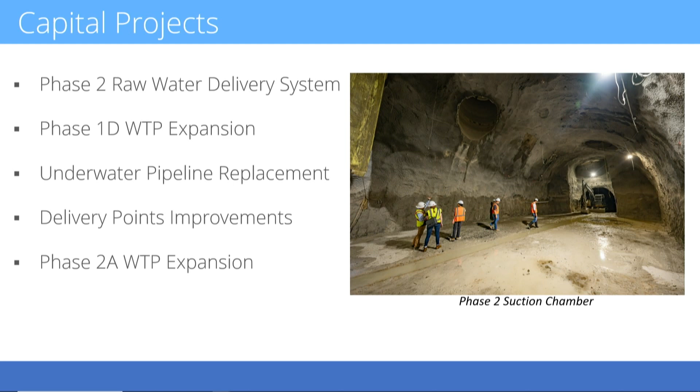I'm going to run through the same projects we've been doing for the last year or so, give you a brief update on the status and how we're doing contractually. The projects I'll cover today will include the Phase 2 raw water delivery system, the Phase 1D water treatment plant expansion, the replacement of the underwater pipeline, delivery point improvements, Phase 1 and 2, and the Phase 2A water treatment plant expansion. I want to start with the big one, the Phase 2 raw water delivery system.

We issued NTP back in June of 2022, so we're beyond halfway on that project. Contractually substantial completion is February 16th, 2027, with final completion of April 17th, 2027. So we're at about 56% on a time basis, 945 days of 1,700. In terms of contract value, we have paid just under $117 million of the $225 million contract value to the contractor, which is Thalle SAK Joint Venture.

We have had one change order on the project for $237,000, no change to contract time as part of that change order. That change order covered a number of things, but the primary item on it was to add some additional electrical improvements to tie a new generator at Cedar Park's water treatment plant into the Phase 2 system. They purchased those generators after we had started construction. And then with this particular project, the contractor is behind schedule. It has triggered the need for them to submit a recovery schedule, and a recovery schedule is still pending.

I want to cover some of the work that has been completed on this project since the last update that I gave you. We did achieve a major milestone on the project. The contractor did complete the concrete cast-in-place liner on the intake tunnel, or the tunnel going from the intake to the pump station. That's about an 8,800-foot-long tunnel. Substantial amount of concrete went into that operation. They have completed that and removed the formwork, taken that tunnel all the way back, if you remember having gone down there before, all the way back now to the main shaft.

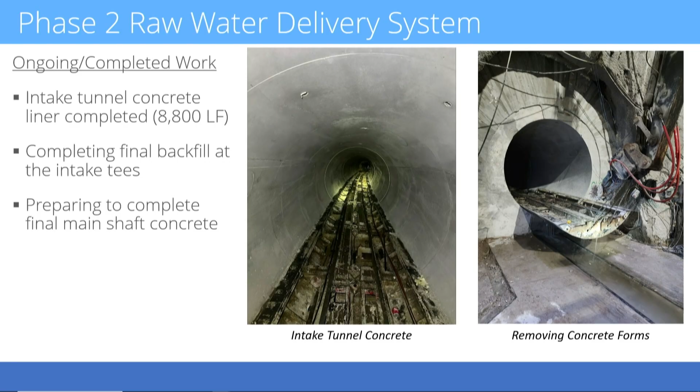They have then gone back into the tunnel, and they're completing some final work at the tie-ins for the 2 intakes at the far end of the tunnel to complete that tie-in to the cast-in-place concrete liner. And the contractor's now preparing to do the lining of the main shaft. There's a portion on the bottom of the main shaft where they had not done the concrete work. They wanted to wait until they brought the intake tunnel concrete back to the main shaft, so now they're working on tying in the main shaft concrete to the tunnel concrete.

Work is also ongoing for the pump shafts. There's a total of 6 pump shafts on the project. The contractor's going through a process of mining out those shafts with raise bore construction, installing a steel casing within those shafts, and then lining that steel casing, backfilling it with grout. Happy to report the contractor has now completed 2 of the pump shafts. Pump shaft number 2 and number 5 were completed about a week ago, and so they're moving over to starting the raise bore operation for pump shaft 1. And you can see a couple photos of those shafts looking both from up at grade at the pump station side and then down beneath at the suction chamber.

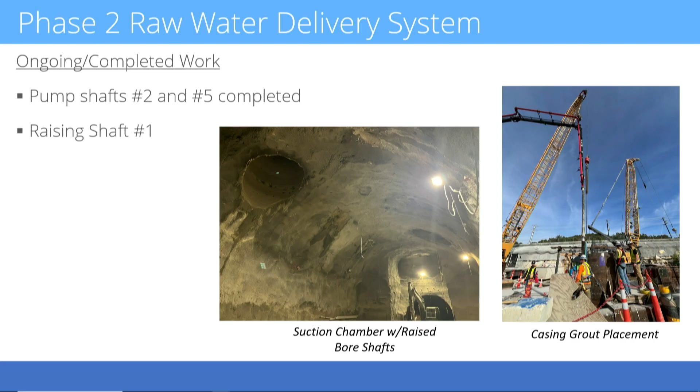In the last few weeks, the contractor has also completed a major work effort at the end of Trails End Road, where they needed to go into the 78-inch diameter pipeline that had previously been installed during Phase 1A and add a butterfly valve, a 78-inch butterfly valve, to the end of that line. That work did require a shutdown to complete it, which had been coordinated and scheduled with the cities. They were able to get that valve installed within the 5-day shutdown window that we had set aside for that work, and operation is resumed to BCRUA water plant.

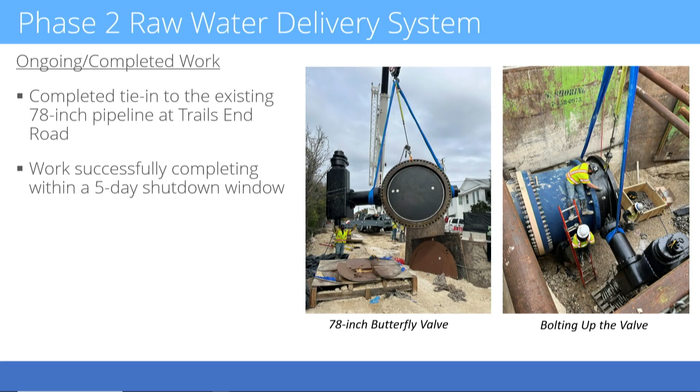For upcoming work on Phase 2, the critical path remains on the completion of the 5 pump shafts. There's actually 4 pump shafts and then another shaft that will be constructed for the transmission pipeline. At the same time, the contractor will continue working on the concrete for the main shaft. And then once the pump shafts have been complete, the contractor will do the cast-in-place concrete liner for the suction chamber, and that will essentially complete the majority of the underground work.

The contractor TSJV is also planning to restart work at the maintenance building site, and then they have been working on the tie-in for the Sandy Creek Water Treatment Plant to the 78-inch line in Trails End Road, and some of that work will continue as well.

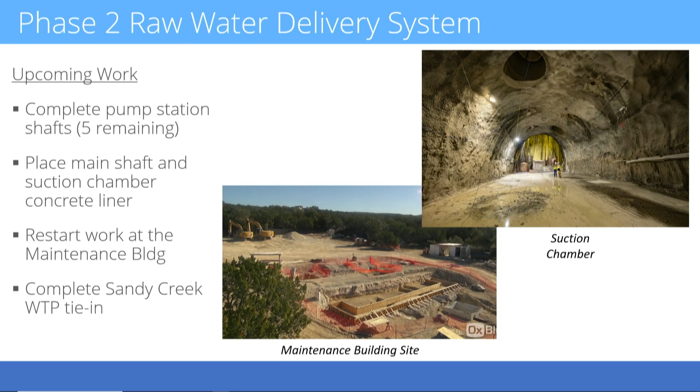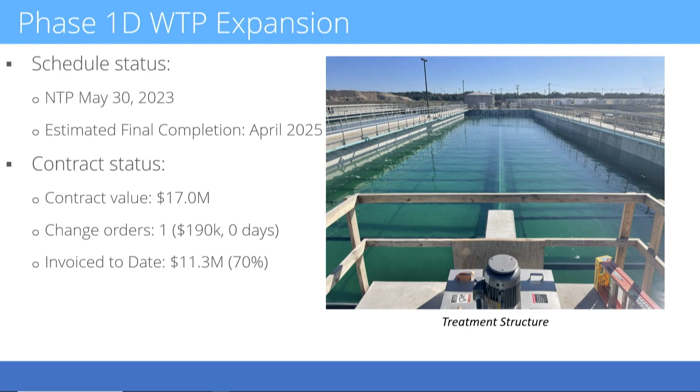Moving to Phase 1D, the notice to proceed was issued back in May of 2023. The estimated final completion for that project is April of this year. Contract value of $17 million with $11.3 million or 70% invoiced to date, and 1 change order. The contractor for this project is Excel Construction, and Excel Construction has been completing a great deal of work out at that project site. Some of the recent work that's been completed is the construction of the raw water head tanks that you can see a photograph of here.

They have also completed construction of the treatment basin and installed the majority of the equipment in the treatment basin, as well as having successfully completed leakage testing of the basin. The contractor has also constructed the thickener and installed the equipment in the thickener, and has also installed the belt press. They've had a lot of crews out there working really hard on this project, advancing it forward pretty rapidly. The main upcoming work that they'll be completing is some of the improvements to the chemical feed systems, and then we'll go through a commissioning and startup phase.

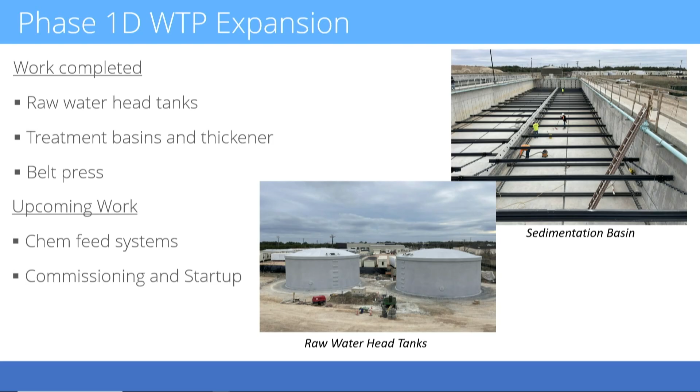On the underwater pipeline, that project has been substantially complete for a fairly long time. You guys remember we got that pipeline installed after a shutdown. There was one punch list item that needed to be completed on that. There's a 36-inch valve over at Trails End Road that the actuator had been installed incorrectly, but we couldn't get in there to address that until there was a line shutdown. So while the Phase 2 contractor was working on installing that valve at the end of Trails End Road, they also went in and repaired this actuator so that it would operate correctly, which now means this project is complete, and I will hopefully not be giving you any updates on it again.

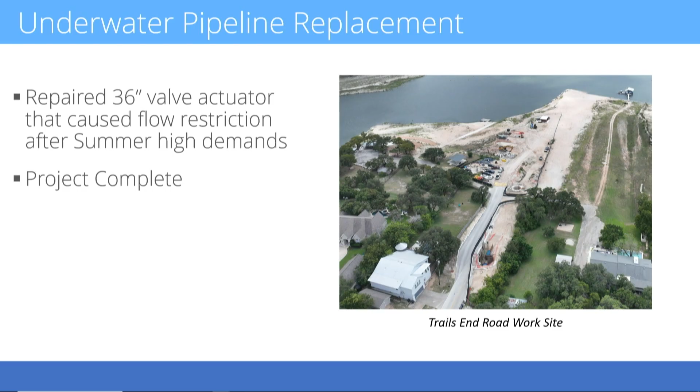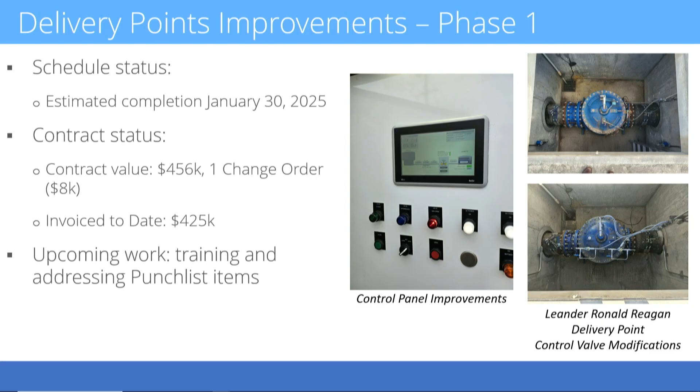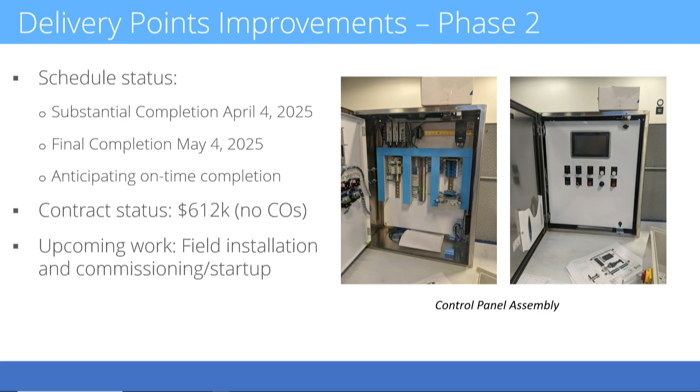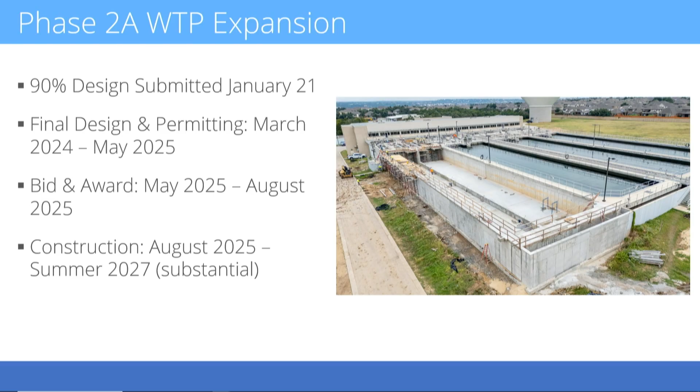I had mentioned the SWIFT application. We are currently working on pulling together the abridged application to submit to the Water Development Board. Leander and Round Rock are both participants in preparing that application. Cedar Park is not a participant in Phase 2A. And the funding we'll be looking for is for construction of Phase 2A as well as construction phase services.

The abridged application, we've gone through this process with you many times, but the abridged application will be due February 3rd. After we submit that to the Water Development Board, they will rank all of their applications and then notify those who make the final cut to submit a final application. Final applications are typically due around the beginning of May. We get notified around the beginning of April.

So we will submit the abridged application in a little over a week, and then we'll have a period of not hearing anything. But once we get to the month of April, we will have a lot of activities coordinating with BCRUA Board, as well as the Leander and Round Rock City Councils to get all the authorizations that we need to submit that final application. Can I answer any questions?